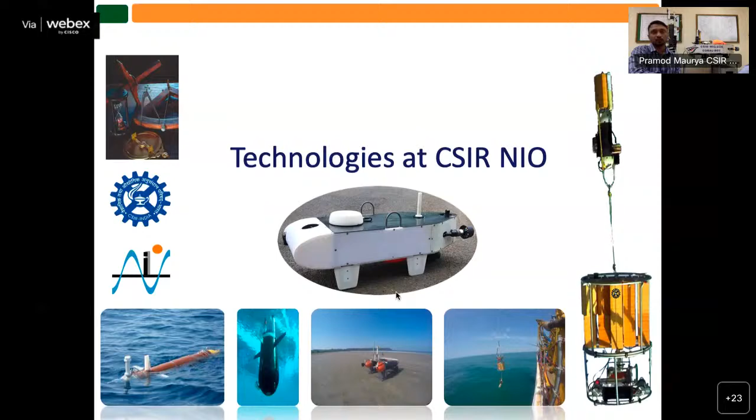We started our work long ago in 2004 by transforming a remotely operable vehicle, which moved on the surface, into a marine robot that would move by itself. That was our first project in marine robotics to develop an autonomous surface craft. We thought it would be an extended arm of a ship, which you could put out, throw in the water, give it a mission, and it would move around while you deploy another one at the next point.

While coming back, one can collect these surface crafts. This was the main idea, and also the starting point from scratch in marine robotics. We had to learn a lot of algorithms on guidance, control, navigation, mechanical sealing, and all that stuff. This vehicle started work in 2004.

We built a small one which could do chlorophyll measurement on the surface, and then finally we built this small one which could do near-coast bathymetry. This covered some of the coast in Goa, including Candolim Beach, where 8-kilometer long transects were done very near the coastline, with depth approximately 2 to 3 meters, almost touching the surf zone.

So this is a challenge: when you have such a vehicle and it goes into the surf zone, how would you still be able to maintain its stability when the waves are pretty high? This work was done recently, and we have been using this vehicle for bathymetric surveys, especially in lakes and very coastal areas.

Your audio, please. Yeah, sorry for this glitch. I hope I'm starting from where I left off.

This was the technology which was awarded in 2010 as an NRDC Innovation Award. There have been many users, and recently two of these units were also sold to BARC for environmental monitoring in water.

Now, the principle of this unit is fairly simple. It remains vertical when thrown into the water because the center of gravity and the center of buoyancy are adjusted in such a way. In the beginning, the buoyancy of the vehicle is more than the weight and the thrust, so the vehicle would just float. As soon as we start the propeller, the thrust force becomes more than the buoyancy, and the vehicle goes down. Then it has an echo sounder to detect the sea bottom.

We can adjust the thruster so that the thrust and buoyancy are equal to each other, and the vehicle hovers at that place, maintaining either a certain distance from the sea bottom or from the sea surface. Then we switch off the propeller, the buoyancy becomes greater, and the vehicle goes back up to the surface, transmitting its data or whatever information we require. So this is how it works.

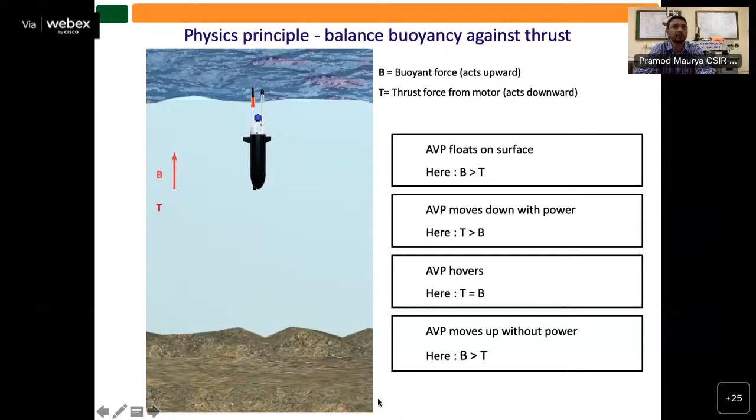This unit is more like a vertical profiler, but it sits at the sea bottom. It has a winch system and communication between two devices: the up unit, which records the profiles, and the down unit, which is responsible for releasing this profiler. We can program it so that at any given time of day, or for any number of profiles per day or per month, it triggers the upper unit to go up based on its buoyancy, with a winch releasing it.

This winch uses a normal tether that does not communicate over the wire, so communication between the two units is done through acoustics. This communication is very important for data redundancy—data is saved in both the down unit and the upper unit, so if the upper unit gets lost, the data is not lost.

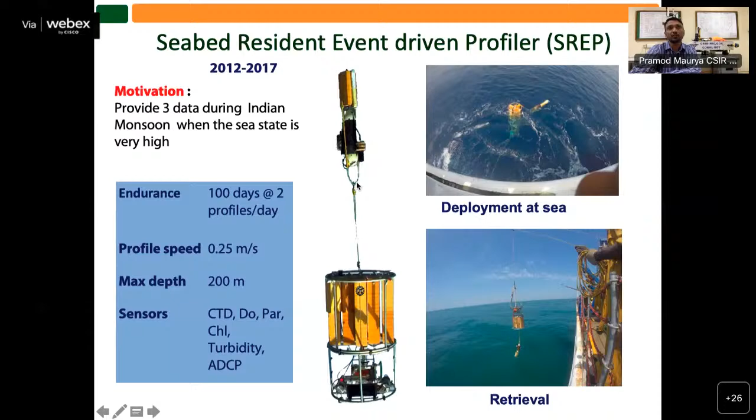Most of the time this unit is sleeping, and when the seabed unit powers on, the profiler unit must also power on at the same time. That is how they perform acoustic communication—they wake up over acoustics, the two devices, and then initiate the profile. This unit has been deployed multiple times over a long period, off Gujarat and off Goa.

Here it was deployed for more than 30 days. It has done 66 profiles, and it shows how the chlorophyll is not really on the surface, which cannot be captured by the satellite, and it shows that at depth you have high chlorophyll. So this kind of data can be very useful for these advisories given by MOES for fisheries.

We also have another technology which we developed, which we call Integrated Coastal Observation Network. So all of these wave rider buoys, sea level gauges, and all our devices are connected through one network, and the data from all of these devices keeps coming to our web server, through which it can be accessed.

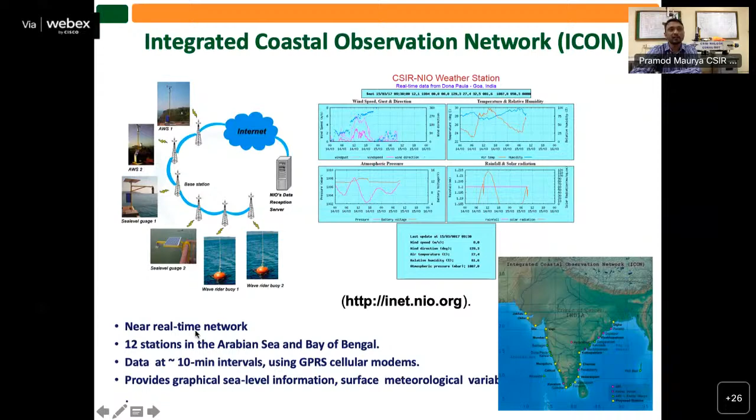Now, there is one example during the Hudhud cyclone time on the East Coast. Many of the units were down, but that is the time when NIO's website got maximum hits because one of these weather stations was still transmitting that data to our server.

So the most recent development which we have done, which I'm going to talk about in a little more detail, is a coral reef and surveillance robot. And this robot we started building in 2018.

And now it has reached TRL level 8, where we have demonstrated it in the real environment. With little more work, it can actually be seen as a professional device which can be used by the industry.

So the main applications we thought of are seabed monitoring, which includes all kinds of industrial applications like pipeline inspection and search and rescue, and, importantly from the environmental point of view, it can be used for coral reef monitoring.

So we worked on mechanical, hydrodynamics, communication system, all that which is required for an underwater vehicle, electronic hardware, software, navigation, guidance and control, which we have learned over all these vehicles, and we have become one of the experts in this for underwater vehicles, electrical systems, and of course safety of the vehicle itself.

This vehicle is designed in such a way that it can transform into a long-term device where it can dock into a docking station, maintain itself, and do surveys at given times, and it will also have its own charging capabilities.

So that's a future thing, but right now the vehicle is able to be used as an autonomous underwater vehicle, which can do image and other scientific data collection for any given survey.

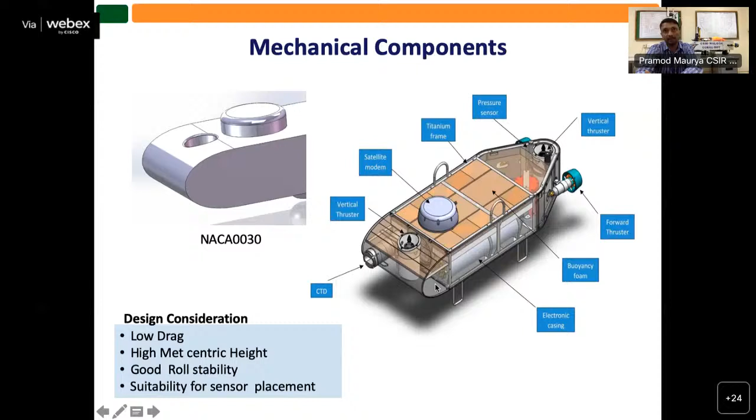and when it cannot be connected to the radio frequency modems. So this has all the vehicle payloads which are required. Apart from that, it has the capability of carrying side scan sonar, cameras, and imaging sonars as well.

So we normally follow a method whenever we have an idea to design, whenever we have a requirement from the industry or from researchers: we start a project, and in the middle or beginning of the project itself, we try to invite industries to see how useful it will be for them. One of these inventor-user industry workshops was conducted for this device, wherein we had invited people from different sectors of industry, and many of them are already here in this meeting as well.

And we gave a preliminary demonstration of the vehicle at that time on the surface. We discussed what it will be able to do, and we had industry involved right from the beginning on this.

And then we moved it—that was a confined water test—and then we took it to the beach here. This is our Bambolim beach here in Goa. And you see how two people can actually take it and put it on the coast.

And the water here is very turbid, so we cannot show you underwater images, but at least we can show you in the video how the vehicle is moving on the surface. It was carrying two buoys on the back as marker buoys, so that we can see from afar where the device is.

Getting it to the main work of coral reef monitoring and into the real environment, the vehicle should be able to take images and videos of the seabed. This vehicle was operated here in Grande Island, where it acquired coral reef images underwater. We did several missions there, lawn mowers, straight lines, and many other planned missions. This is one of the videos showing the vehicle moving.

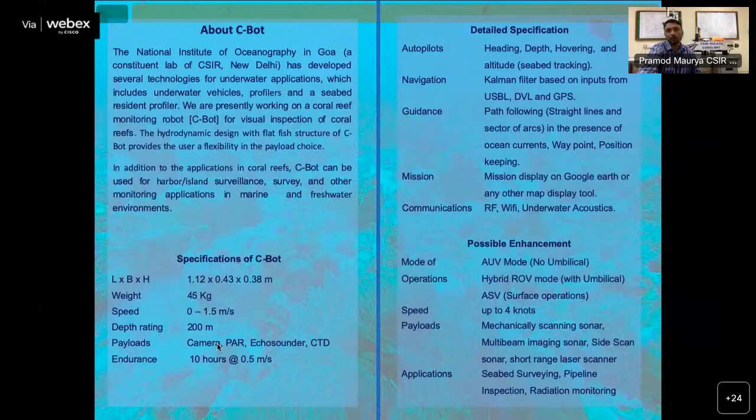Now I would give a little glimpse about future technologies we are going to work on. We call it hybrid AUVs, because autonomous underwater vehicles cannot send a live feed from the bottom due to the bottleneck of acoustic communication, whereas remotely operated vehicles are connected through a tether and operated manually by an operator on top. What we wanted to do is make an autonomous vehicle which is also connected through an umbilical, from where real-time transmission of images happens, but there is no human operator on top. It is self-driven, and if the umbilical gets cut, the vehicle knows where to go, completes the mission, and comes back to the surface.

So what we did is take some recent existing hardware and transform the software completely so this whole vehicle can become an autonomous underwater vehicle, where we only give the mission survey from the top and just watch. Not only that, we are planning that whenever the vehicle sees something interesting based on artificial intelligence, it would trigger the user on top, who can take command and say, give me a high resolution scan of that particular area. This kind of mission will be very near-future technology, which we call hybrid AUVs.

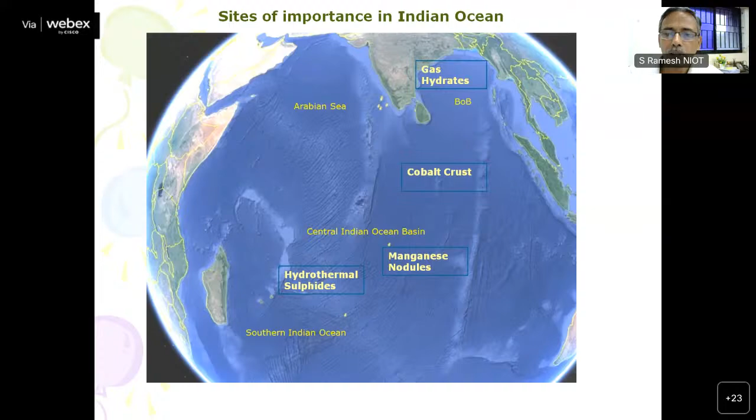Basically this tells us what to look for in the deep sea, and there are many challenges in the deep ocean, which all of us are aware of. One is the pressure, another is the temperature, and acoustic is the only medium of communication. It's highly corrosive in seawater, and a very dynamic medium, because those who have sailed in the ocean know how difficult it is to put a vehicle there.

Heavy vehicles need big launching and recovery systems, which is a big challenge, and we have a very small seasonal time window available to deploy and retrieve them. We need suitable materials and hydraulics connected to a stable platform with DP. So many environment-related technical challenges are there, and over time, we are overcoming them one by one from a design perspective.

We are now mature enough to take forward these technologies, but we need industries to come along with us, because most of the components we are looking for right now for deeper water applications are being imported from abroad. So these discussions will take forward how much indigenization is possible in the coming years in this underwater technology.

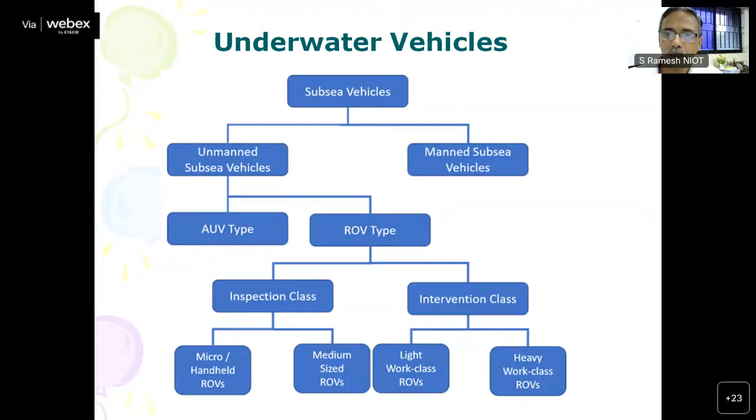So all of us know about the underwater vehicle. One is the unmanned vehicle family, another is the manned vehicle family. AUV has already been talked about by Maurya, and subsequently Dr. Nandi will also be talking about the AUV. So I'll mostly be covering the seafloor based vehicles and the remote vehicles. The manned vehicle will be talked about by our friend Dr. Vedachalam after me. So basically, this is a remotely operable submersible which is developed by NIOT.

It is a 6,000 meter depth rated vehicle. It is a heavy work class ROV, which needs a lot of subsystems. It was an initial design where we collaborated with Russia. Then from that design, we took it forward, imported all the components, and integrated them. Then the testing and qualifications were done by us, component wise.

So it has an ROV which can go up to 6,000 meters at the bottom. It will be connected by a tether of 400 meter cable with the tether management system. These two will be together, and it will be linked by a 7,000 meter umbilical cable on top as a storage winch. And this is our ship, Sagar Nidhi.

So we can see the size of the components which we are handling. We need a big ship plus a platform. We have a heavy launching and recovery system to handle almost 8 tons of weight, which is 3.7 tons of the ROV, and another 3 tons of the tether management system together. It needs a heavy crane, and the cable has to be handled with the traction winch, to take the load of the cable once it is released into the water. Then we have a storage winch of 7,000 meter cable.

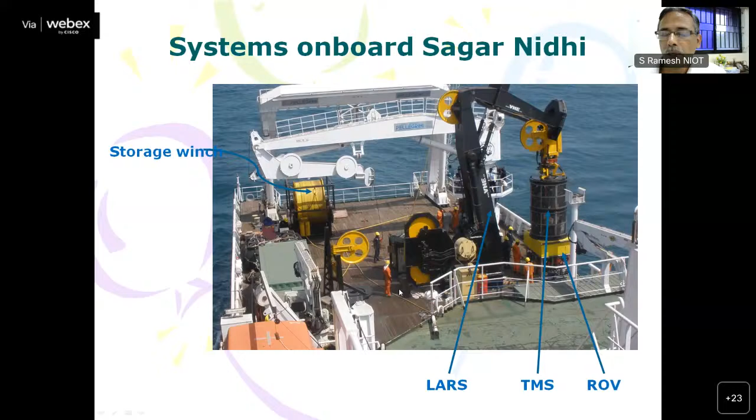So this cable is again imported, from Nexans. We had connected this entire vehicle. We have 2 containers - we used to take containers, consoles, and the power systems in our own ship, Sagar Nidhi. This is the vehicle which has been developed and demonstrated its capability up to 5,000 meter depth. This is the specification of the vehicle.

As our director said, it has gone into different types of seafloor mineral explorations. Basically, it is of 3.7 tons. It's a heavy work class vehicle - only 4 or 5 vehicles are available in the world of this class. It has a manipulator arm, 2 robotic arms which are hydraulically connected, and it has scientific payloads also - temperature, oxygen, conductivity - and we can add any other payloads.

And mainly it is driven by BLDC thrusters. So there are 2 thrusters for the forward motion and 3 for going down, because it's a buoyant vehicle. Along with the TMS, it will be taken to 6,000 meters. Then it will be disengaged from the tether, and then we will operate the thrusters, with 2 for the lateral motion. So there are 7 thrusters in this vehicle.

We are looking forward to the development of indigenization of these thrusters also. This is how the power systems are driven from the ship-based power, going through the 7,000 meter umbilical cable. There is a variable frequency drive, so we are increasing the normal voltage of 400 volts into 6,000 volts, and the frequency also from 50 hertz going to 460 hertz. With that high frequency and high voltage, through the umbilical cable, we drive the tether management system, and then it goes into the ROV. There are subsea converters which give direct DC voltage of 300 volts and 24 volts for the thrusters, as well as for the lights, power, and other sensors.

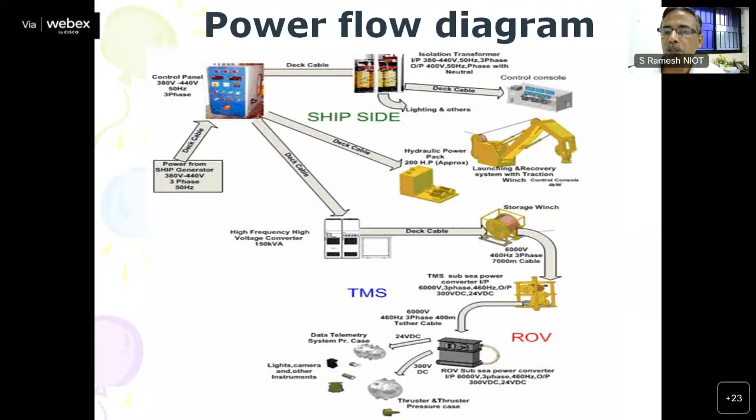So we are looking for industrial partners for any of these components that can be chosen and indigenized. It is possible, and you can visit our institute anytime to see the components interfaced in these systems. This control system architecture houses 3 PCs where we have a pilot and co-pilot screen, and a display for the engineering screen. It has been communicated with the PXI system, through which we have the TMS and ROV. We are using LabVIEW based National Instrument hardware and software for the controls and operation purposes, which will be connected through the cameras, lights, and sensors.

Since it's a long cable of 7,000 meters, we need optical communication to transmit the controls, so we have 2 slip rings coming into picture. Slip rings are rotary joints connected to the 7,000 meter deck storage winch, and in the underwater tether management system we have an underwater slip ring. Globally, there's maybe only 1 firm, or 1 more, available with proven technology for this type of rotary joint that gives communication to the subsea level to transmit all the data sets.

So we have slip rings connected through fibers. We now have the expertise developed for this concept of how the slip rings can be designed and developed, as well as the termination assembly for the interface of splicing for underwater purposes with the fiber optics. And there will be a control console.

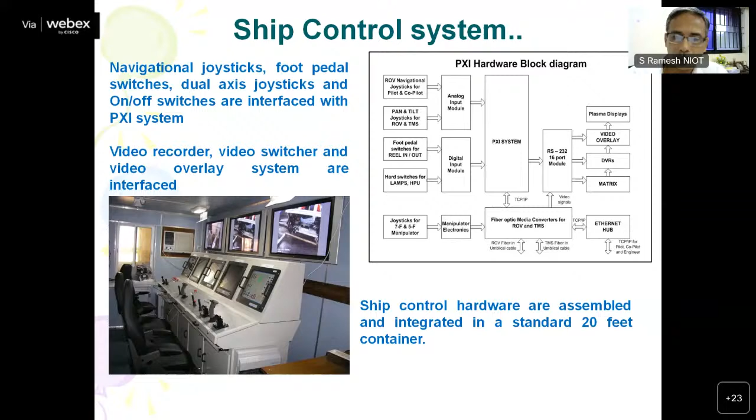This console also has been done in an indigenized way, but components are again getting imported for the interfaces. We have a control console where we will be sitting and operating the vehicle in a 20 feet container, which will have the manipulator control separately. The manipulator is imported from the International Submarine Engineering agency in Canada. This is how the ROV control systems look - I've put one small picture here.

We have to have the wirings and interconnections of all the components in a small pressure case. We have 2 types of underwater components: one is pressure case driven, where components can be kept at 1 atmospheric pressure, and another is pressure compensated devices, which we use for the power systems and similar.

These components will be used with the inertial navigation system, interfaced with the PXI. Then the command will go to the cameras and other control systems. So we need partners who can also assemble this, with that expertise available - it will also be useful for our type of purposes.

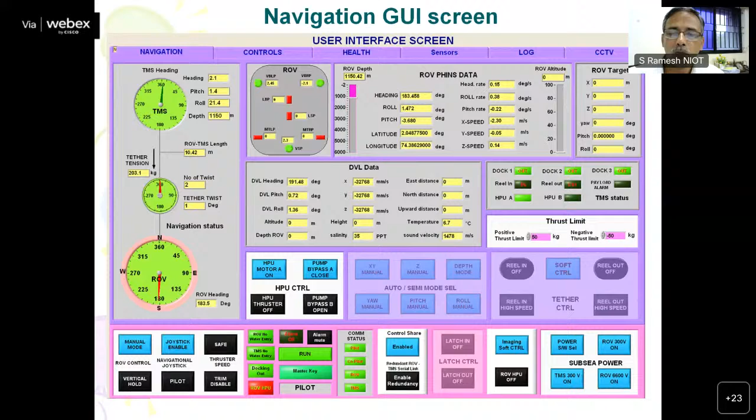As I said, LabVIEW is our own software which we control through NI, and we have different screens which have been augmented over the period of our experience - how to display all the components during our operations, and in case of any emergency, alarms and so on.

We had deployed this vehicle up to 5,289 meters water depth in the Central Indian Ocean basin, where we collected nodules using a push corer and robotic arms with manipulators, which proves the vehicle's capability. We undocked the vehicle and were able to go to the sea floor and get mapping, along with outputs for scientific needs.

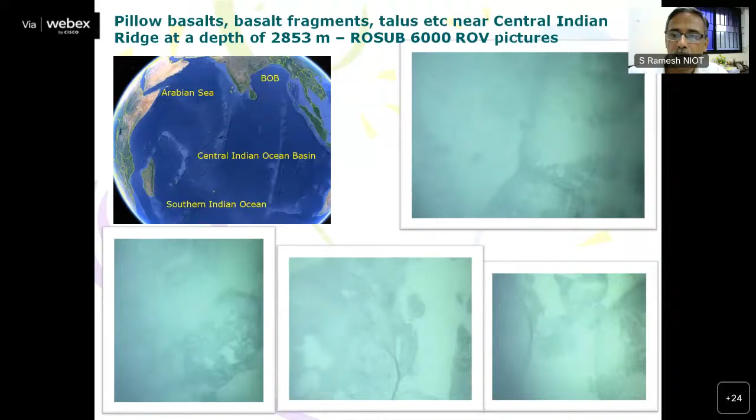This vehicle was also used in the AN-32 aircraft search operation at 3,400 meter depth, but unfortunately we were not able to locate that object, because of its dimensions and since it's a torch-like vehicle, we had to go near it. We only saw the soft seafloor with organisms, and were not able to detect the target.

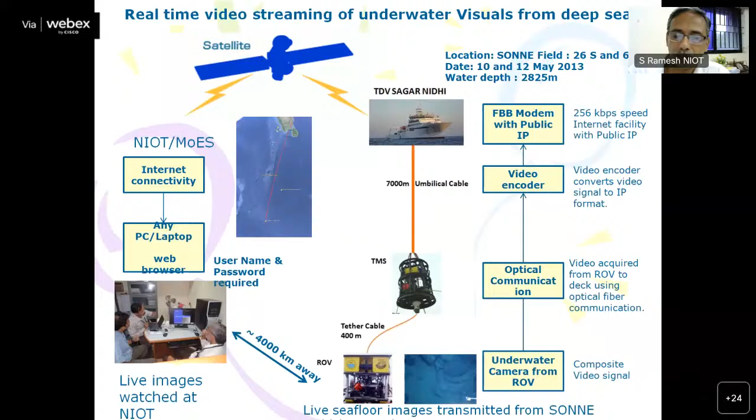But this vehicle has had multiple uses for different purposes. Basically, this technology is proved and is available with us. We are also transmitting the knowledge - when we do the operations, it gets transmitted to our main base stations by online video streaming, connected through the optical modem to the base station, so people from NIOT can watch what is happening at the deep sea.

Another vehicle we subsequently developed because of market necessity. 6,000 meter vehicles are very cumbersome - they are big vehicles, and only a few are available in the world. But when we go for a shallow water vehicle, it will be good.

That was the thought process. So we had developed another shallow water ROV vehicle, which is a 500 meter depth rated one, made of polypropylene with syntactic foams. It is again 300 volt DC with 5 kilowatt hour power, and has BLDC thrusters. There are 4 thrusters: 2 for forward, 1 for lateral, and 1 for vertical motions. This is how this vehicle is developed.

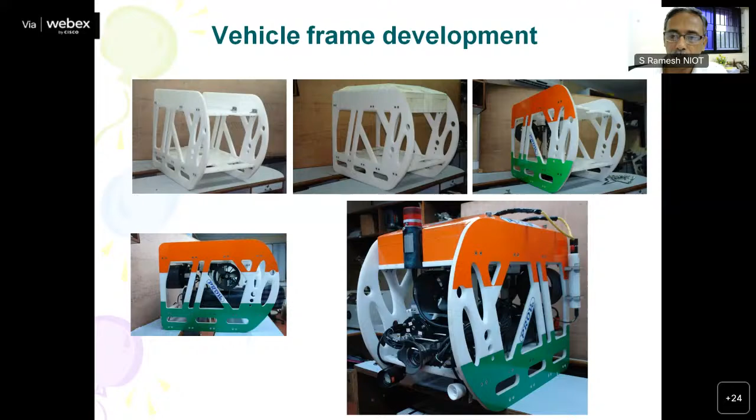There is a frame with polypropylene sheets, and we assembled all the components on this vehicle. Again, it is 300 volt DC converted from the ship systems, and many of the components are indigenous, with our own design and our own termination assemblies. Only the underwater components like thrusters, cables, lights, and cameras have to be imported.

One good thing that happened on this program is we could discuss with the cable industry, who are also participating in today's discussion, and we could make the earlier imported components from Nexans for the deep water cables indigenous. We now have 2 cables procured from APAR. They have developed the capability of electro-optic umbilical cable development for shorter distances.

So that is one good outcome of this shallow water ROV development, and we are actually using those cables now. There will also be a small console, so it can be used on any fishing trawler type small boat, and we can put together all the vehicles and go for operations.

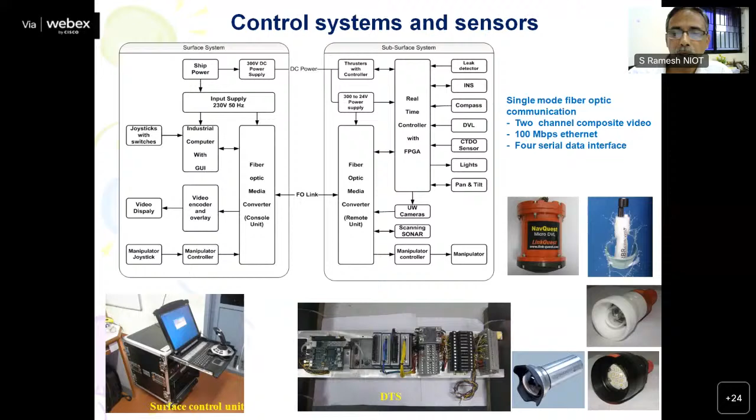This vehicle has been used at the Antarctic station for ice shelf mapping as well as near-lake studies, and it has been used for seaweed mapping at 40 meter water depth off Mangalore. We could see the seaweed distribution there. And for coral reefs also in Andaman, around 5 islands, we could monitor very quickly within 4 or 5 days.

It's a very stable vehicle which has proved its capability for operation up to 500 meter depth, and it has been used extensively for some classified object identification at around 70 to 80 meter water depth in the Bay of Bengal.

Another system we are developing is the integrated mining system, rated for 6,000 meter depth. It has a lot of subsystems and components. This system is handled by Commander Gop Kumar, and it has a deep sea crawler, which is a track belt based vehicle.

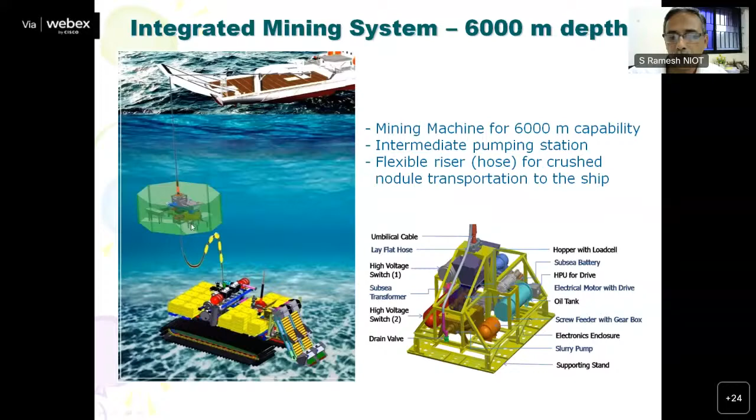In front, we have collector devices, and the nodules available at 6,000 meters will be collected, crushed, and pumped to the middle station, and then there will be a flexible riser to go to the top. We had demonstrated the capability of this vehicle for locomotion at 6,000 meter water depth at the Central Indian Ocean Basin. In the coming years, the collectors will be performed, then the riser has to be done.

It has a lot of complex technology. Nowhere in the world has this technology been proved, and India is also one of the forerunners in proving this capability for nodule mining systems.

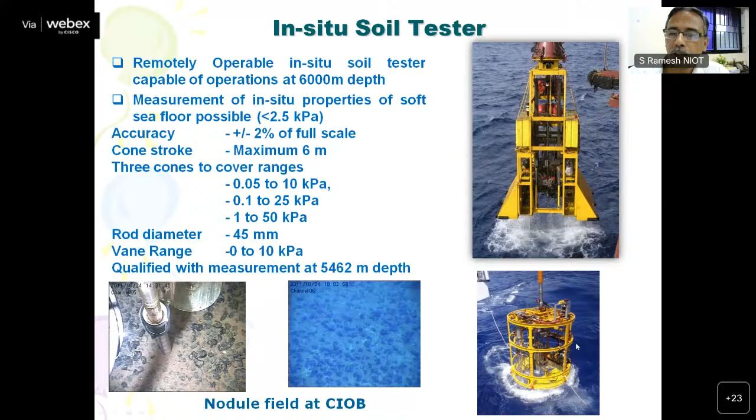We have also developed the soil tester, rated for 6,000 meters, to be used before putting the crawler into the deep sea floor. This is the nodule field at 6,000 meters. It has been proved at 5,462 meter water depth. This is the in-situ soil tester, which can be used for seafloor strength and shear strength measurements.

We have also developed a deep sea autonomous coring system with an industrial partner from the US. Only 3 such systems are available in the world. It's a deep sea subsea drill that can go up to 3,000 meter water depth and collect 100 meters of subsea core in 3 meter sections in a robotic way.

It has large feet on the bottom, which can be opened up with hydraulic systems, then sit on the seafloor and drill further as required for coring. These are all the different subsea systems. It's like a ship-based drilling unit put into underwater use, with only the umbilical connected on top.

It will be similar to the control systems and power systems discussed for the ROSUB 6000 and the crawler-based machines. So we will be operating from the top using camera devices, operating the drill machines and drilling units. It has a big frame, with all the power bottles kept on one side and the drill heads on the other side.

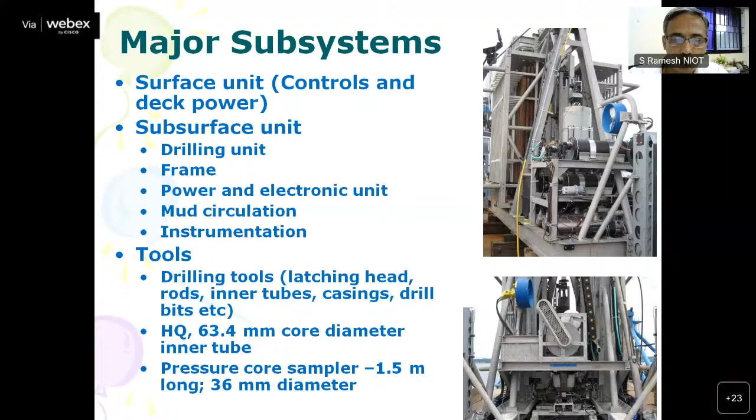We will be connecting 3 meter sections to go for the 100 meter coring. These are all some of the underwater pictures which were done at 1070 meter water depth and 2000 meter water depth. So these are all the pipes which are connected.

There will be a rotary mechanism from the top of the drill. We can disconnect 3 meter sections, then take them back into the magazines. Then we can connect another tube and drill another section of 3 meters. We can use a wireline tool to pick up the sample alone, and again put it back.

So all the operations are of a depth rating of 3000 meters. We had qualified up to 2920 meters, and then we could collect 60 meters of the subsea floor from the Krishna Godavari basin. So these are all some of the samples collected from the core, which are of scientific interest and can be used for geotechnical purposes.

And recently we had augmented ourselves with the autonomous underwater vehicle, a 6000 meter underwater vehicle, procured directly from Kongsberg Maritime from Norway. This vehicle is a 6000 meter vehicle for the exploration of deep sea minerals, which has a lot of scientific payloads like multi-beam sonar, synthetic aperture sonar, sub-bottom profiler, ADCP, and all that we are looking for.

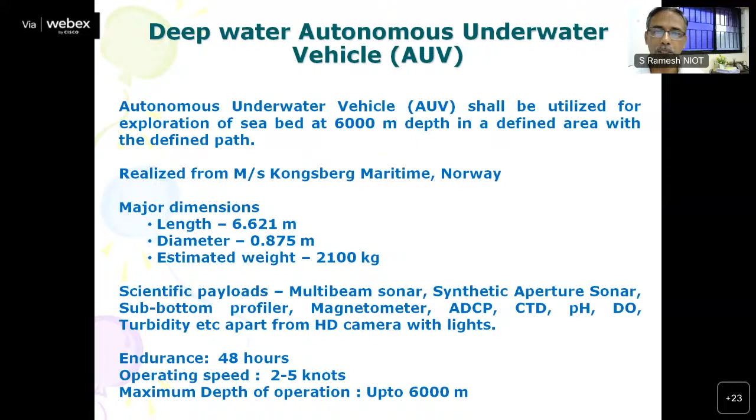It has 48 hours of long endurance. So once you program it and put it into the water, we can wait while it covers the lines. When we pick it back, we will download all the data sets. It can go up to 2 to 5 knot speed. If we are going only with the multi-beam data sets, we can even go for 72 hours of endurance. So based on our own program, we can intervene with these systems.

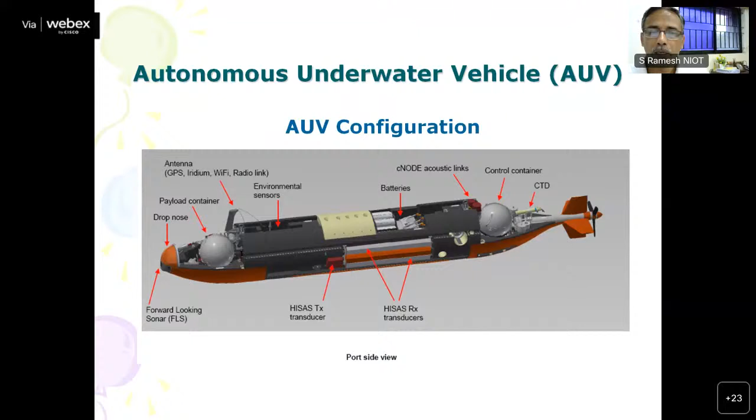This is the vehicle which has different types of sensors and payloads. It is from the Hugin family of Kongsberg, and it has already proved its capability for 6000 meters in different places. Now we procured one system from Hugin, called the Ocean Mineral Explorer. We are calling it OME 6000.

It has a velocity log and it has a containerized launch system. So we have to carry a 30-foot container and put it on the aft of the ship, and it is of 2-ton weight. It has its own hangar with a launching platform, and it will be tilted 45 degrees and slid into the water autonomously.

It will go into the water, then on a pre-programmed way it will do the job. It will surface back, then there are mechanisms to pick back the vehicle onto the top. Again, we will pull back the vehicle on top. This has performed at Norway, almost 1270 meters water depth, and it has performed its operation successfully.

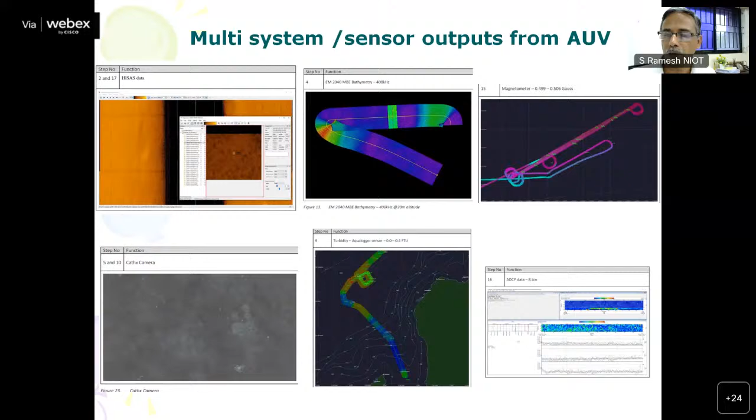Now this vehicle is at NIOT. We are going for exploration this September and November for the 5000 meter water depth for deep sea exploration. And based on our experience with the ROV technology, we had transferred this technology to L&T Defense and Bharat Electronics with the know-how available. We are closely hand-holding them for any requirements if users are coming, and it can be a first prototype ROV which can be transferred.

We had also indigenized the shallow water winch for the 600 meter cable and the terminations, which we mastered for the 6000 meter. Apar Industries gave us the cable, and Ruby International Ghaziabad gave us the winch. We gave them the design, and they were able to fabricate it with even the connection for the rotary joint for the slip rings.

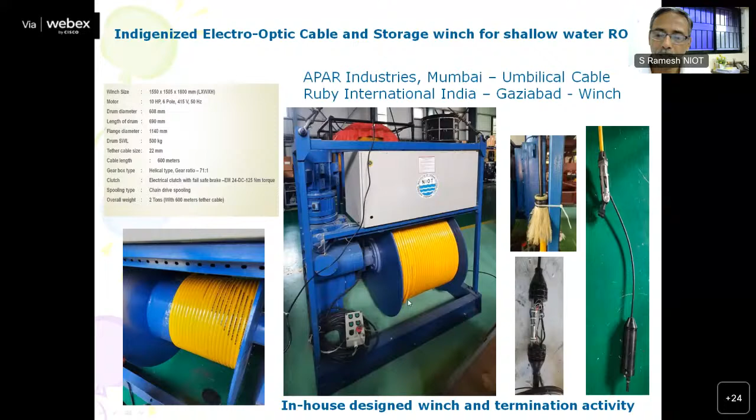So one more expertise developed is for deep water, where termination assemblies are very critical. NIOT has this capability in the country to do mechanical termination, electrical termination, as well as fiber optic termination put together in one cable, for operation up to deep water of 6000 meters. Earlier we were paying almost 50-60 lakhs for one termination to foreign agencies. Now we have this capability, and we could do it the indigenized way with our own people in the institute.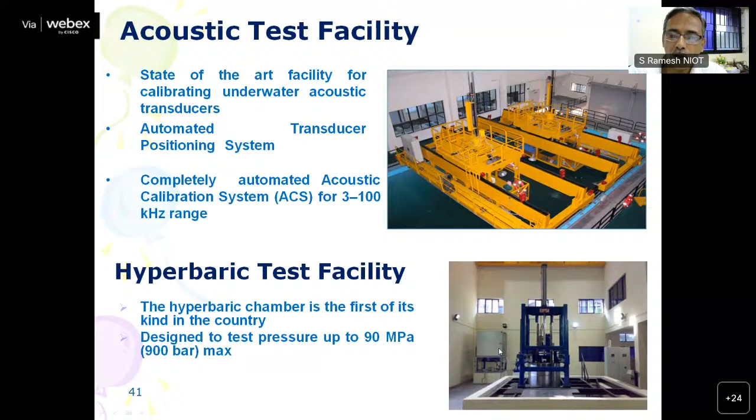This technology also we are willing to transfer to whomever we are looking for. We have two facilities for underwater testing that we wanted to convey. One is the acoustic test facility tank, where we can put any components for testing. And we have a hyperbaric test facility for 900 bar pressure, 90 megapascals, where we can put all components and test them live to monitor when they fail and when they succeed. These facilities are also available to industry to qualify any components if they are investing, and then take it forward with our own vehicles.

These are the few things which I want to put forth to the industrial partners: we are desperately in need of BLDC motor-driven thrusters. For all of us, whether it is for NIO or for defense purposes, defense labs and NIOT, BLDC motors and the deep sea winches of larger size, and underwater cables and connectors, we are paying heavily to the industry and international partners.

If any industry comes forward, we can facilitate testing for rotary joints, pressure compensators, underwater cameras and lights, manipulators, low density buoyancy modules for flotation of vehicles, termination assemblies, hydraulic cylinders and manifolds, and latching mechanisms. These are a few things I thought to put forth into the industry's mindset.

So at the end, I would like to say that the middle part of the 4 vehicles, we have already developed. Then the autonomous underwater vehicle we procured from Kongsberg, 6,000 meter one. Right now we are working on both ends: the integrated underwater mining system for deep water, which will mine and pump the nodules to the surface, and the manned submersible Matsya 6000. These two are the deep ocean mission critical programs we are handling right now. The manned submersible talk will be delivered after me, by Dr. Vedachalam in detail.

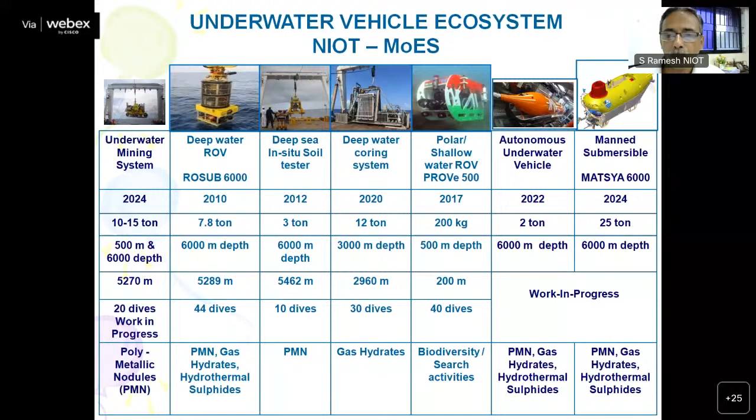Finally, to sum up the discussions from the strategic perspective, different organizations can form alliances, form partnerships to jointly invest in emerging industries to overcome local market restrictions, diversify our risks, and gain mutual benefits. So how we can work it out, we can think of all these things.

There are a plethora of design and development opportunities available to the private sector in manufacturing for underwater systems. You might have seen the NIO presentation by Maurya, and now this presentation, followed by two more presentations by our colleagues. This will show that different technology and knowledge is available with scientists and technology organizations. How to translate it into industry, we can work out.

So it will give us self-reliance in design and construction with indigenous components. The aim of this meet is to have the capability available within India for product realization. In order to fulfill these aspirations as a strong industrial base in ocean technology, now the time has come for us to come together and strengthen ourselves by filling the gaps in our weaknesses.

Earlier we were all in silos; now we can put it together and come out with a concrete plan to utilize the infrastructure, manufacturing capability, and test facilities available within ourselves. The government is encouraging such type of partnerships, so we are ready to support it.

Industry and academia in a collaborative roundtable provides opportunity and roles for each of us instead of overlapping each other. It can be done with concrete measures, with a societal centric approach and strategic need and commercial interest. With this, I would like to close my presentation. Thank you.

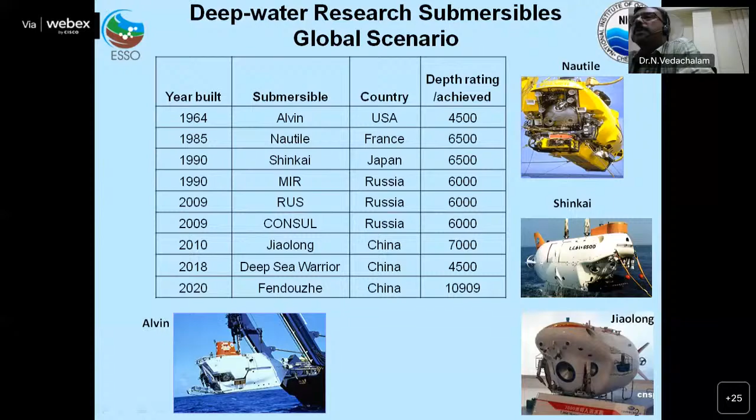So India has also now joined the race to the sea bottom using this manned submersible Matsya 6000. As we all know, this is a mini submarine which can carry 3 people down to 6,000 meter water depth.

It is an untethered vehicle which will be launched from the ship. So you can see the submersible being launched from the mothership using the A-frame.

The system comprises 2 parts: the ship system, which comprises of A-frame and launching systems and other respective controls, and other communication devices such as underwater telephone, positioning devices, surface finders, etc. on the ship deck.

The submersible comprises multiple subsystems, including the personnel sphere for human occupancy, human safety and support systems, frame, ballast and trim systems, buoyancy packages, battery power for maneuvering and propulsion, control hardware, communication and navigation devices, imaging system, etc.

So initially the work on this manned submersible started some 8 years back by NIOT. Initially the plan for the ministry was to procure a manned submersible with technology transfer from outside.

Later there were multiple challenges, and before 3 years, the government decided that under the Make in India concept, we can develop our own indigenous submersible. The expertise was pooled and the work was started. So this is the history behind this development.

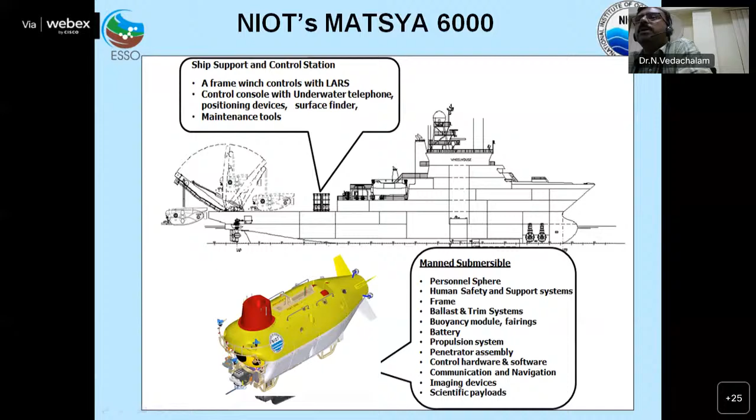This project is being monitored and guided by various experts in addition to the in-house team. Based on this, the specifications of the manned submersible are something like 6,000 meters water depth, and the human cabin, which we call the personnel sphere, will be made out of titanium alloy grade 23.

It will be of 2.1 meter diameter. The main challenge is making the spherical sphere out of titanium alloy. The accommodation will be for 1 pilot and 2 crew. The number of viewports will be 3: 1 primary and 2 secondary.

The vehicle speed will be 3 knots forward, lateral 1 knot, and vertical also 1 knot, which will be enabled by 6 kilowatt thrusters. Endurance will be for 12 hours and the emergency period will be for 96 hours.

The life support system inside the human cabin will comprise an oxygen supply system and CO2 scrubber system, and that will be designed for catering 12 hours of operation and 96 hours of stay during emergency.

The overall weight is being targeted for 25 tons. The dimensions: it's 9 meters long, 4 meters breadth and 4.5 meters high. The payload which is designed, which the submersible can take, is around 200 kg, enabled by manipulators.

It can take these payloads in pieces, and it can put it in the science basket and bring it to the top.

The propulsion is powered by battery power source, mainly lithium polymer batteries. These are special compensated batteries. For propulsion it is 100 kilowatt hour, auxiliary is 20 kilowatt hour, and emergency is 5 kilowatt hour. Total put together, the energy sources on board will be 125 kilowatt hour.

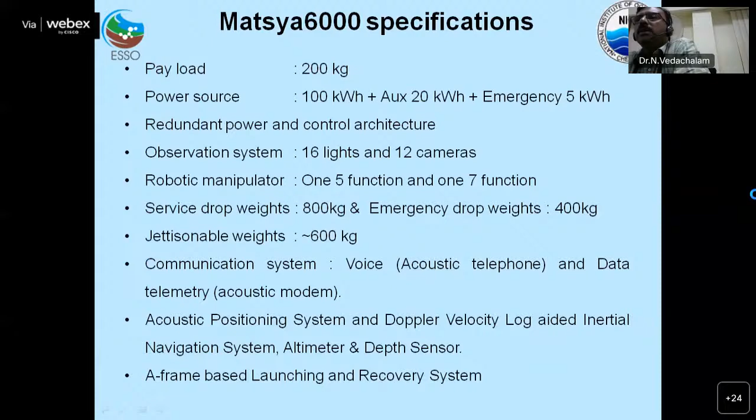So the design team has done a lot of basic design, and it has been reviewed by multiple experts, and we have the Norwegian global certification agency called DNV in place, who will validate the design, oversee the design, and give clearance for man-ratedness.

Based on this, various subsystems have been identified, and the general arrangement is being made. The hydrostatic stability is being confirmed for stability and freeboard, and the hydrodynamic analysis is also done, so that the mission period is met with the available energy capacity, etc.

So you can see this. This is a human cabin where 3 people will be sitting inside, and there will be a hatch at the top for people to enter. There will be 3 viewports, primary viewport and secondary viewport.

For catering the life support for the people, there will be sensors inside, and there will be oxygen supply and scrubbing inside. In front, there will be a manipulator to take in the payloads and keep it in the science basket.

There will be communication systems mounted on the top to communicate with the ship, and there will be guidance antennas for guidance and navigation system mounted on top, preventing any shadow zones. This is called the sail, which will be put on top of this one.

By this, we have something called a ballast management system, called main ballast system, which can take in water of around 3 tons, and make it negatively buoyant and go down.

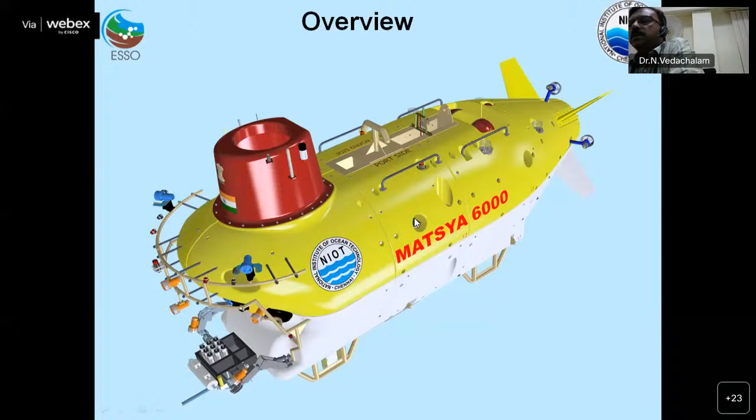So the concept of operation, I will give a little glance of this one. As I told you, the launching of the submersible takes almost 3 to 4 hours to go down to 5,500 meters water depth, which is the deepest part in the Indian Ocean. As explained by Dr. Ramesh, we have various resources, hydrocarbon as well as mineral resources, spread over the Indian waters, the Indian Ocean, Bay of Bengal, Arabian Sea, etc. And the maximum water depth is 5,500 meters, and therefore we have designed the submersible to go up to 6,000 meters water depth, and accordingly the systems are designed.

So now, as I indicated, this is called the main ballast system, and this is called the variable ballast system, and there will be some drop weights which will be fitted on board the vehicle. So this will be launched from the ship, and at that time this main ballast will be empty, and when it is floating, it will give a freeboard of some 1 meter, as per the statutory requirements and safety.

And then when it is ready for the deployment, or when it is ready to dive, the main ballast tanks will be filled, and it will attain a negative buoyancy of 300 kg, and it will have a terminal velocity of 30 meters per minute, and it descends down at the required rate of 30 meters per minute.

And the important thing is that before going, and in between, what happens is that because of the salinity of the water and the compressibility nature of the water, the different parts of the submersible will be subject to different types of compression, and therefore there will be a change in the buoyancy.

So as I told you, the instrumentation and control architecture, if you can see, this is the human cabin. All control systems are located inside. We have a data acquisition system, a pilot PC, co-pilot PC, navigation PC, everything. As you can see, it is axisymmetric, a mirror image, so that failure possibilities can be reduced and availability can be increased.

All these systems are connected to the exostructure through high integrity penetrators, which are advanced versions of seals. Connections to the exostructure systems, including the data acquisition enclosure and batteries, are all located in the exostructure. Everything is done using a special arrangement called pressure compensated junction boxes, which helps reduce failures. There will be two main batteries on the port and starboard side, interfaced directly to the junction box and in turn to the personnel sphere and the power distribution enclosure.

Two enclosures will house power conversion systems enabling variable speed operation of the propellers. We have the data acquisition and imaging enclosure, also axisymmetric in architecture, connected to this one. We also have service drop weights and emergency drop weights, symmetrically placed. Under any circumstances, we comply with SIL 3 level of architecture, and the moment the safety reliability integrity level falls below SIL, a decision will be taken by the pilot to surface back without compromising human safety.

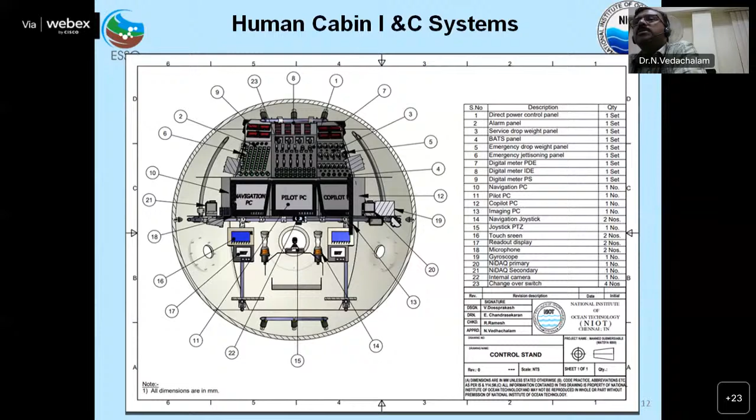First is the comfort level for the three human beings, since they are important for the mission - it's a manned mission - so all three people have to be comfortable during normal operation as well as emergency periods. They occupy 30% of the space, instrumentation occupies another 30%, and the remaining space is occupied by the life support system, comprising oxygen cylinders, nitrogen, etc. This view shows the complexities of how a human cabin should be engineered and populated so as to have the best possible ergonomics as well as ease of operation and comfort.

So in that way, we are planning to make the thing for Matsya 6000, taking into aspect reachability and easy readability. Mainly, these three people will be here during 96 hours of emergency. You can understand how the psychology of the people will be, what the energy level will be. So the switches will be placed in such a way that it will be easy to operate. So you can see this is one hemisphere of the personnel cabin.

Then you can see fire extinguishers, emergency breathing apparatus, etc. These life support systems are made to support 12 hours plus 96 hours of emergency, totally 108 hours. There will be a carbon dioxide scrubber. When the carbon dioxide exceeds the predetermined limit, this will start operation, and they are based upon soda lime chemical.

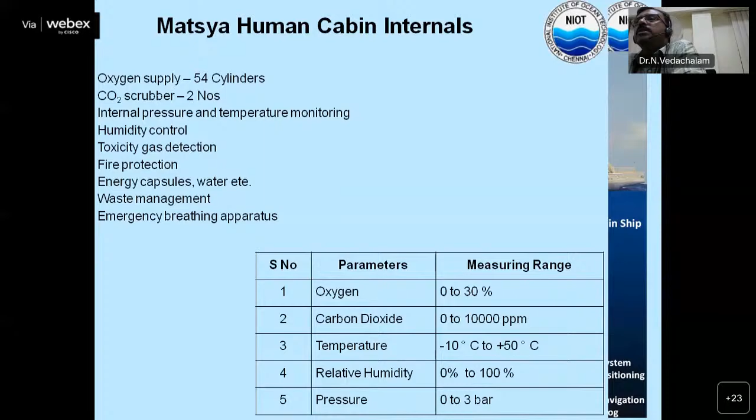With respect to navigation and positioning systems, this is Matsya 6000 underwater. It will have a Subsea GPS which works on the surface and supports dead reckoning navigation. There will be a depth sensor to see the depth for safe maneuvering. Using the INS DVL, it will determine the position and help vehicle navigation.

There will be two acoustic positioning systems. One system will work with reference to the ship, and another system will work with reference to the submersible. Both will, through acoustic communication, exchange data, and this will help us achieve the highest level of reliability for positioning. There will be a mission control system at the top which will help connect these devices and track the submersible. So this is how the integrated navigation system will look.

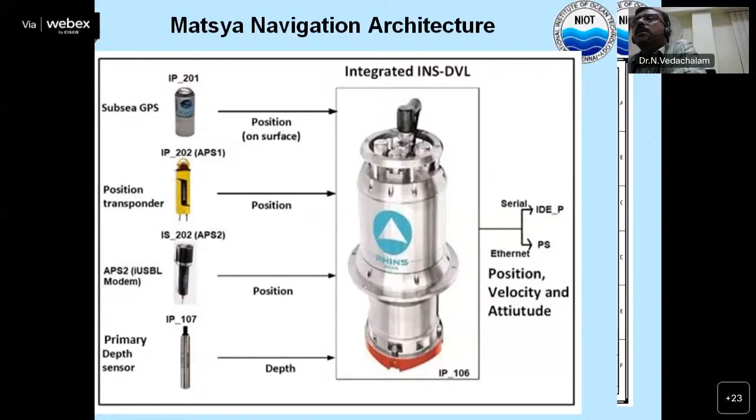It will have inputs from Subsea GPS and two position transponders and the depth, and it will operate the Kalman filter algorithm, finally giving the position which will aid the navigation personnel or the crew. So this is how the navigation system will be connected.

The navigation system will be spread across the personnel sphere, junction boxes, and external enclosures, connected through pressure rated cables, etc. As you can imagine, these pressure rated cables are very critical, and they have to be tested to the highest level based on international norms, tested at double the pressure to confirm the integrity over time.

Another important thing is underwater communication, done using acoustic telephones. This acoustic telephone we are procuring from abroad, and it is a very niche technology able to work up to a depth of 6,000 meters. The statutory requirement is that it needs to operate up to 12 kilometers slant range. So it is quite challenging, and only one or two companies in the world supply this, and they too are covered under export regulations, and therefore anyone procuring this does so through diplomatic channels.

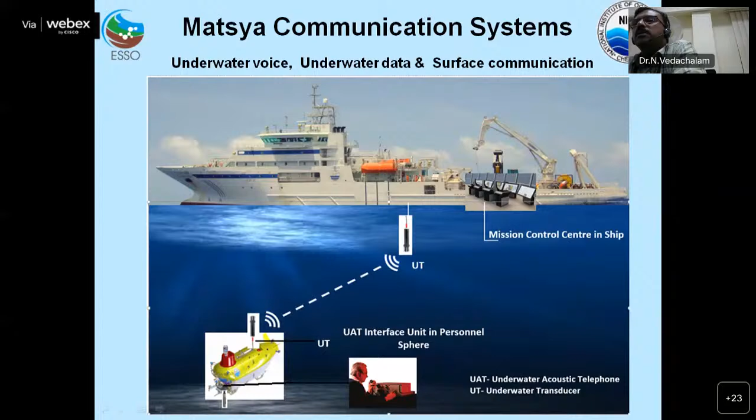As you know, the submersible will have lights and cameras all around, because the ultimate aim of the mission is to collect high resolution data on biology, geology, etc. So it will be placed at strategic locations so that everything will be covered around the submersible at a reasonable field of view. This is how it is interfaced, as I told you for the navigation systems.

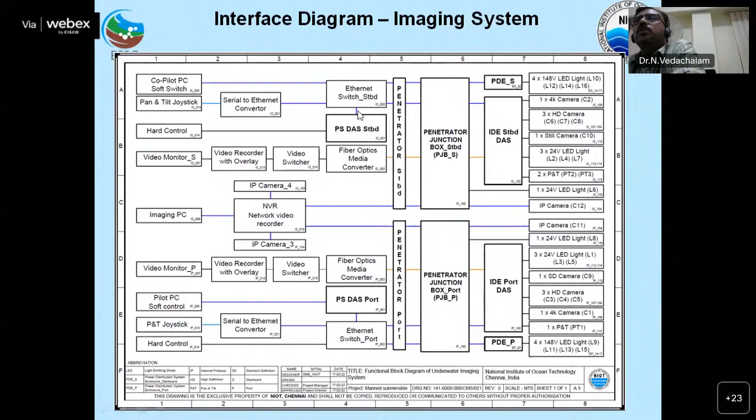These lights and cameras are integrated through different pressure rated enclosures and brought inside the human cabin, and the recording will be done inside the human cabin. So by and large, you can see the instrumentation and control systems of the manned submersible located in different locations.

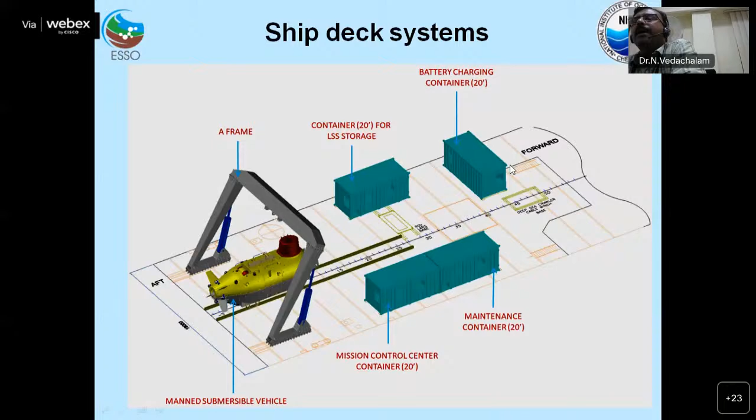As I told you, all these systems will be mounted on the ship. This is the submersible A-frame. This mission control system will be kept on board the ship, and there will be a container for life support systems, battery charging, etc. This will be launched as well. This is a layout which is being planned for launching on board Sagar Nidhi.

As I was telling, the mission control system will be there. There is a guideline called IMCA, International Marine Contractors Association, based on which this mission control system is being designed. More importantly, during an emergency, if the submersible is stranded on the seafloor because of some problems...

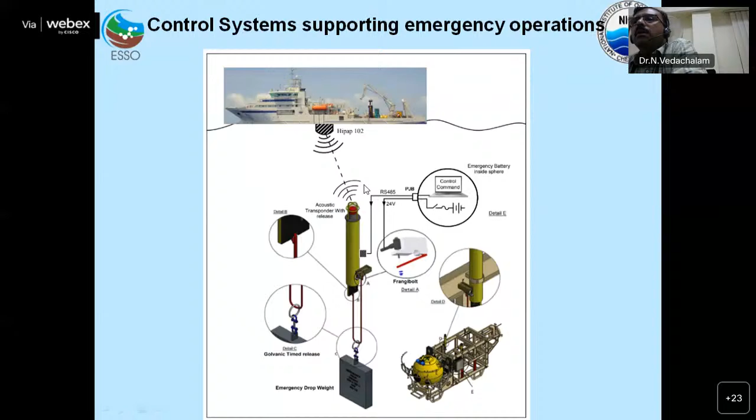If there is an extreme loss of buoyancy, we have this kind of emergency drop weight. The unique feature of our system compared to other operating submersibles in the world is that these drop weights can be ejected using an acoustic command from the ship. This is one of the key aspects implemented in this Matsya 6000.

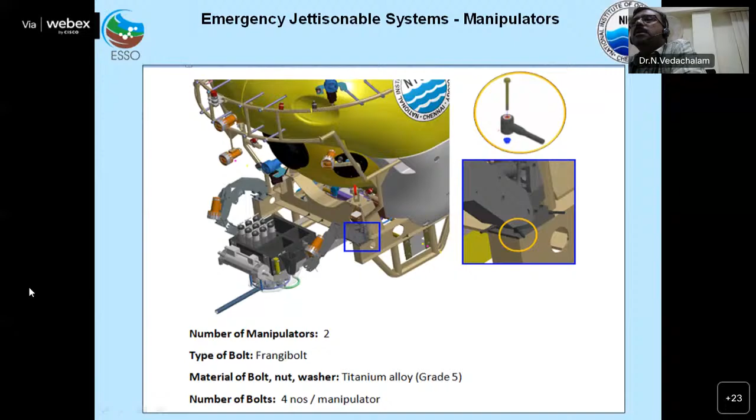As I told you, there are increased possibilities that when the manipulator is enabled during an operation, sampling operation, or intervention operation, it may get entangled with a seafloor object. In that case, we have systems to jettison the manipulator arms alone, and the submersible can come back. This is achieved with this kind of system.

The jettisoning should be done with the available power supplies. Until the availability of the last power supply, this operation should be able to be done. So all sorts of reliability calculations have been done, all scientific methods have been followed, and the best possible configuration has been given to exercise this jettisoning operation.

Finally, if there is a problem of the submersible being stranded on the seafloor which we are not able to recover, and if we're not able to release the weights and come back, we have a system called a buoy, which when ejected by the submersible pilot, will roll out and come to the top, with beacons, the satellite locating beacons at the top.

That is a subsea rated beacon, which will not work subsea, but when it comes to the surface, it will communicate with the ship and the satellite, which will help us locate the submersible. There are also systems being designed by NIOT, something like a messenger mechanism which can be passed through, locked to the submersible, and repaired at the top. It is in the highest level of design currently.

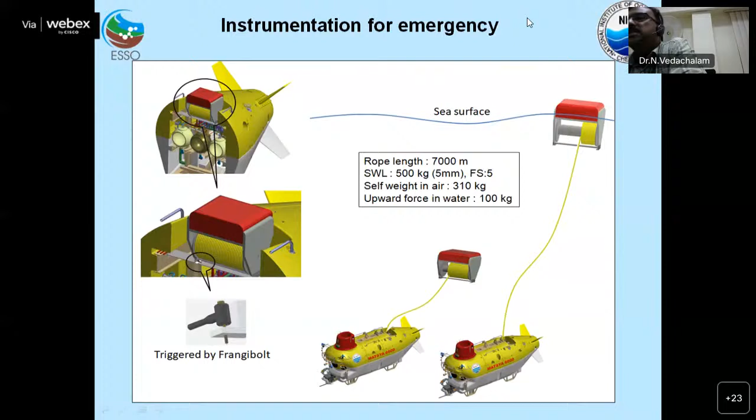In addition, Dr. Ramesh might have mentioned that we conducted a national workshop to find out the needs of the scientific community in terms of oceanographic, biological and geological perspectives, based on which we have identified scientific payloads.

The engineering system is being designed in such a way that based on the mission, whether it's a biology related mission or an oceanography mission, the sensor suite can be interfaced with minimum disturbance to the configuration. So this is what the scientific payload is about.

With respect to this, we have completed the complete design, and the major subsystems of the submersible are under procurement. Almost 50% are procured, and the rest are in progress. Since this is a manned deep water mission, procurement of components is a major challenge because developed countries are reluctant to support this, so many products are developed in-house. We have taken the help of Indian technological majors like ISRO, DRDO, etc., to handhold NIOT in achieving this national objective, to put India on the global subsea human map.

So with this, I end my presentation, and I thank the meeting organizers for giving me an opportunity, and the listeners and audience for patiently listening to my presentation. Thank you very much.

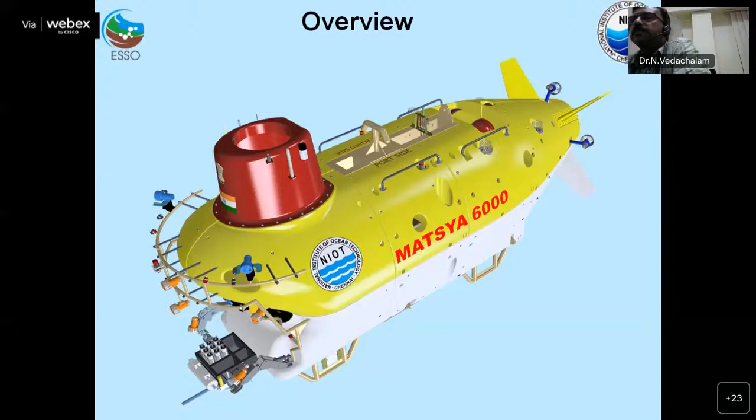Actually, this is the vehicle which is upcoming right now, because it's a manned mission underwater. Almost 5-6 vehicles only are available for 6,000 meters in the world. So we need a lot of partnership, and we wanted to disseminate the knowledge which NIOT is doing on this manned submersible program, and there will be more programs coming up in the manned vehicles also in the coming years, based on our success rate with this vehicle.

So basically, this vehicle's design is now completed. Even at this point, he could not show how many components have already been realized. We are aiming for the end of next year as a target for completion of all the components, procurement, integration and so on. From 2024 onwards, we will be going for sea trials for the integrated system. That is the target we are working towards.

It is highly challenging, being a man-rated vehicle. So we are looking forward to partnerships. Any industries who would like to come and discuss with us and partner with us are welcome. So with these few words, thanks to Dr. Vedachalam for giving a nice presentation and overview of the manned submersible.

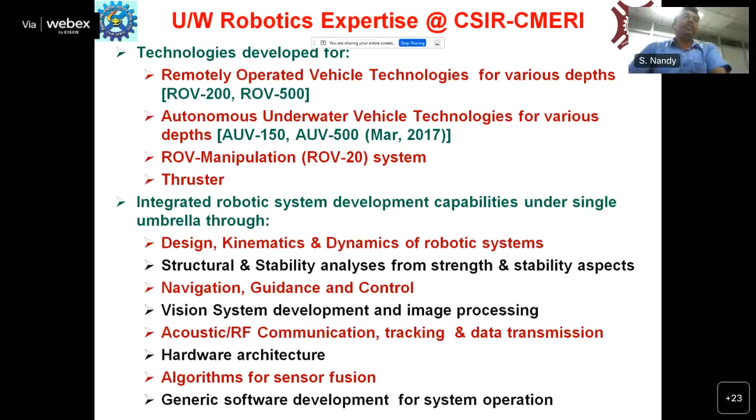This is a typical scenario of working of any autonomous system. It will be launched from the mothership. The vehicle will be operating underwater, and it will have a number of payload sensors as well as navigation sensors and payload sensors. It will have an onboard energy system.

Am I audible? Yes, yes, yes, doctor, okay.

So it will have onboard energy system as well as onboard intelligence, to take critical decisions, like when an obstacle is detected, it will be able to avoid that obstacle, as well as if there is a critical situation like energy level being very low, in that case it can cut off its mission and come up to the surface. It will have a bi-directional communication link, like acoustic modem and USBL tracker. This kind of autonomous underwater vehicle should have a fault tolerant control system, as well as a number of emergency safety features incorporated into it.

This is the broad portfolio: AUV 150, which can operate up to 150-meter depth. Then ROV, which we developed for 200-meter and 500-meter depth of operation. In the recent past we also developed an autonomous underwater vehicle that can work up to a depth of 500 meters. And very recently we developed a small portable ROV with a manipulation system, so that it can pick some objects from underwater, as well as an indigenous thruster that I will show in subsequent slides.

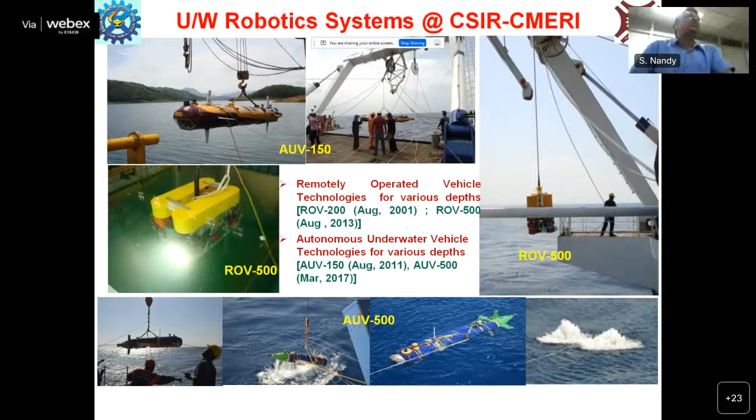This is the AUV which can operate at a depth of 150 meters. This is a work class AUV, length 4.8 meter, diameter 0.5 meter. Weight in air was 490 kg and buoyancy is 495. The basic objective was to map the seafloor and collect oceanographic data like salinity, temperature, and conductivity. The mission duration was 4 to 6 hours.

It was equipped with a number of navigational sensors like INS, DVL, depth sensor, and altimeter, and payload sensors in terms of side scan sonar and camera. It was associated with an intelligent controller to perform autonomous motion like lawnmower trajectory, circular trajectory, or any other trajectory envisaged for a particular application. It was also equipped with a hybrid communication system, acoustic and RF communication.

The vehicle was indigenously developed at CSIR CMERI. The design was ours, and the control software as well as the whole system architecture was done by CMERI. But due to lack of availability of equipment and sensors, those were procured from outside, starting from thruster, navigational, and payload sensors. But the complete development was done indigenously at CSIR CMERI only. This vehicle was tested at the Chennai coast with active support of NIOT Chennai.

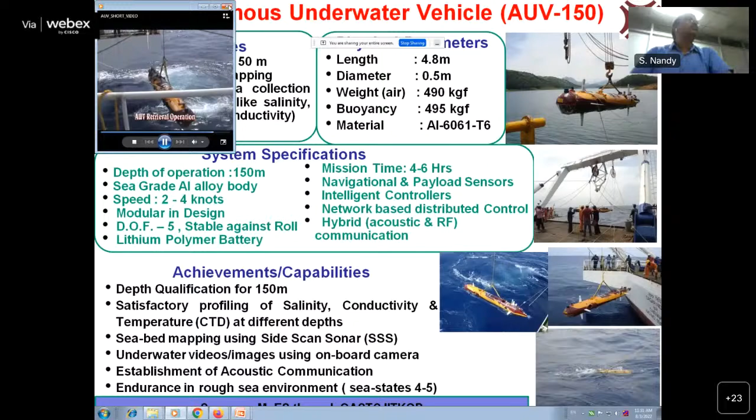This is a small video showing the capability of the vehicle, which can move based on altimeter data only, and it can capture video while it is moving. This video was captured while it was tested at Idukki lake, Kochi, with the active cooperation of NPOL.

So these are some of the glimpses of the picture that was acquired during the AUV trial, and the mapping of the seafloor was done using the side scan sonar data.

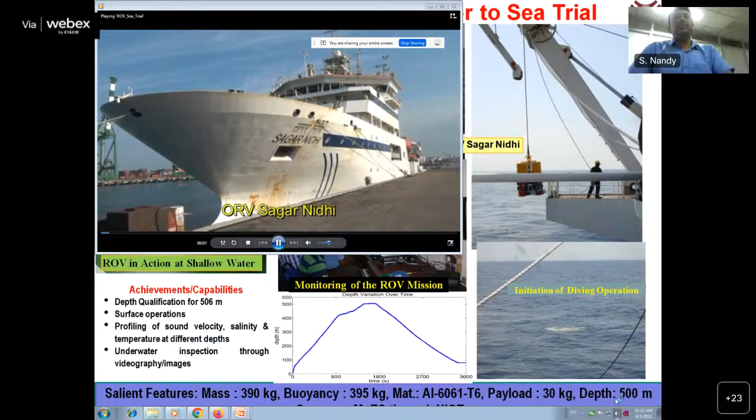So this is the ROV. You have heard a lot of things about ROV, and NIOT has developed ROV up to 6,000 meter depth rating. They have also developed a polar ROV, and CMERI has developed ROV 500. So these are glimpses of the trial of ROV 500 at Chennai coast.

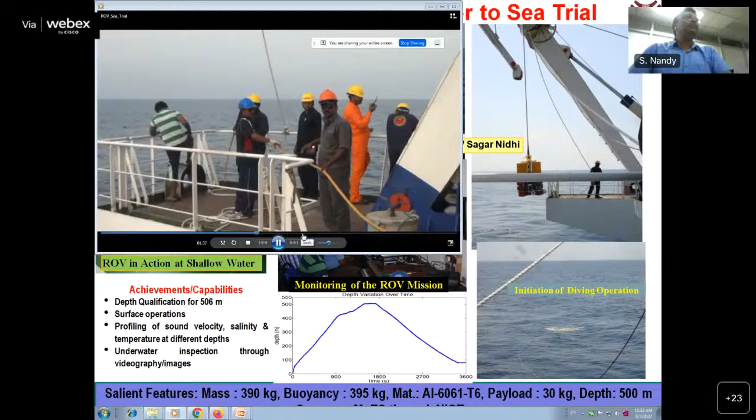So this is the cable umbilical tether. The ROV was tested up to a depth of 500 meter.

Based on this expertise gained, CMERI has developed an AUV for 500-meter depth of operation with CSIR funding. We are very grateful to the Ministry of Earth Sciences, who helped with funding to work on this project of AUV and ROV, and based on that expertise we were able to develop the AUV for 500-meter depth and subsequent underwater systems.

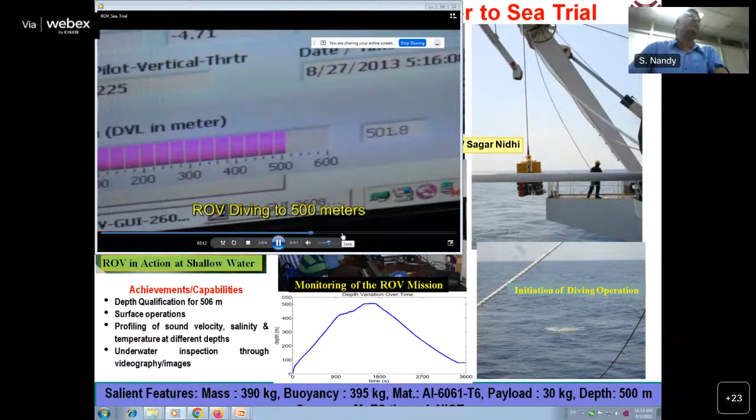So this is the AUV 500 that was carried out with funding from CSIR, and it was tested in March 2017. The physical parameters of the vehicle are: length 3.8 meter, diameter 500 millimeter, weight 403 kg, with positive buoyancy of about 5 kg, and the material for the structure is aluminium 6061-T6. The vehicle was tested off the Goa coast, and we used the ship of NIO because it was a multi-lab project within CSIR.

NIO was associated, CEERI Pilani was associated, CSIO Chandigarh and CRRI New Delhi were also associated with this project.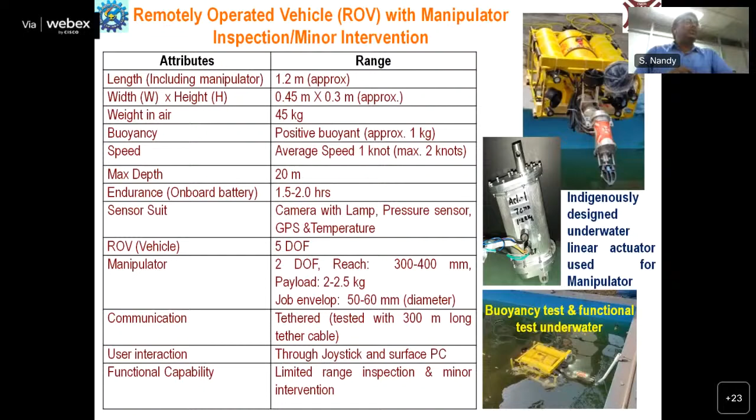Then stress analysis, then hydrodynamic analysis in terms of grid generation, and control surface design - how to design the control surface for various kinds of autonomous underwater vehicles, ranging from small to very high range. Then kinematics and dynamics, sensor calibration, modeling and fusion of sensor data, and of course robust control, navigation, guidance and control, and finally acquiring the payload data and mapping the data with respect to that particular scenario.

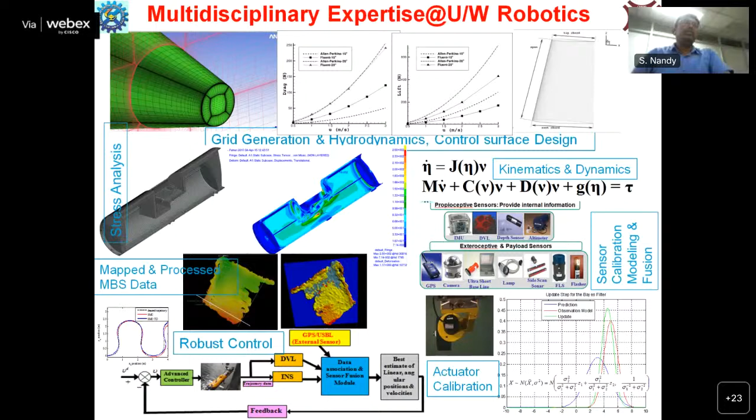So this is the navigation and guidance scheme. This is the trajectory planner, and from there we get feedback from different sensors, and based on that state feedback, the advanced controller will be finding the control input based on the inverse dynamics model.

From there, the relevant torques or other information in terms of voltage or current will be sent to the vehicle actuators, and the vehicle will move. The actual parameters will be measured with the help of the inertial measurement unit, Doppler velocity log, depth sensor, and altimeter. Then there will be a sensor fusion module.

That will give the best possible estimate of the system state based on the Kalman filter, particularly the extended Kalman filter algorithm, and that should be associated with USBL data to get the absolute positioning of the vehicle, and that data will be transmitted to the trajectory planner to get the further control inputs.

Further to this area, the development of autonomous underwater vehicles and remotely operated vehicles to a bigger scale, we are also working in the domain of biomimetic underwater fish fin-like actuators. Fish have different kinds of fins like pectoral fin, caudal fin, pelvic fin, and dorsal fin. Here we have tried to mimic one such kind of fin, the pectoral fin, and we have carried out the hydrodynamic analysis in terms of blade element model.

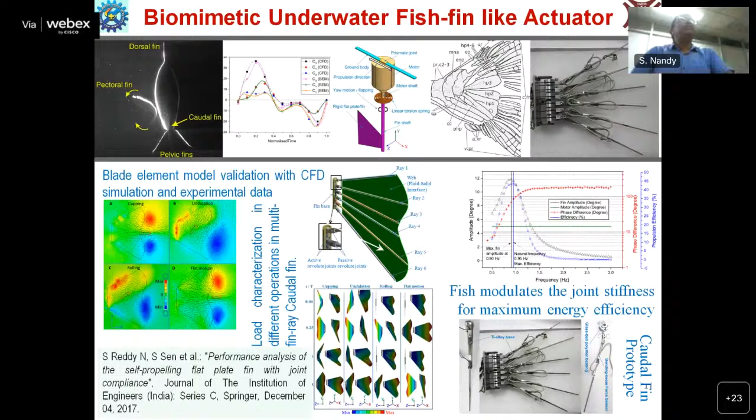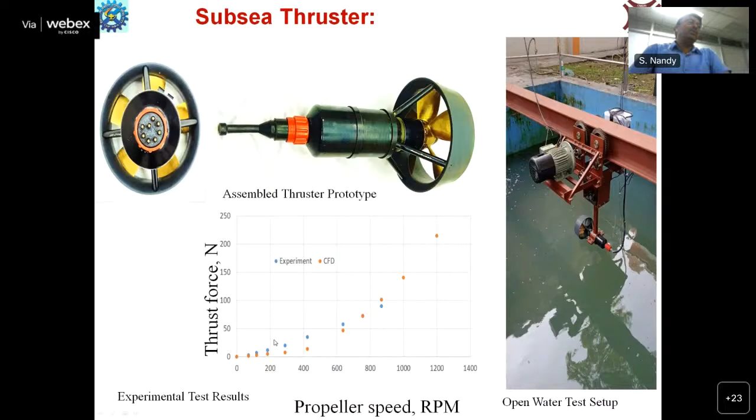So as I said, we have also developed the indigenous subsea thruster very recently. Thrust capacity is 20 kgf, depth rating is 1500, power input is 1 kilowatt plus minus 20%. For this thruster development, the motor was also developed indigenously, not by us but by some parties based in Mumbai and Gurgaon - they developed the motor based on our specification. Other components like the controller, propeller, and all the body of the thruster have been developed at our end only. The test setup also has been developed at our end, and when we tested the thruster experimentally and based on the CFD data, we have validated it.

So then we are also working in the domain of underwater manipulator. As I said, this ROV is associated with a tooling manipulator. The linear actuator has been indigenously developed, and that tooling manipulator with a gripper is associated with the ROV to carry out various jobs, starting from picking some object which has fallen underwater based on camera-based image processing as well as sonar-based localization. This manipulator has been developed and tested for hydrodynamic analysis, and a recursive Lagrangian dynamics algorithm for serial link underwater manipulator with empirical formulations of hydrodynamic forces has been carried out.

Recently we have started working in the domain of homing and docking systems, because autonomous underwater vehicles or other unmanned underwater systems are being developed. But what is the problem while launching and retrieving? While launching, one time it is okay, but when the battery is exhausted, we have to retrieve it and charge the vehicle. So there is a tremendous, extreme need to develop the homing and docking system so that the vehicle can be charged underwater and the data can be transferred underwater only, with the help of a suitable homing and docking system. This is a very challenging task. We have done some primary work in this domain, and we are also going to work on this, possibly under the Deep Ocean Mission.

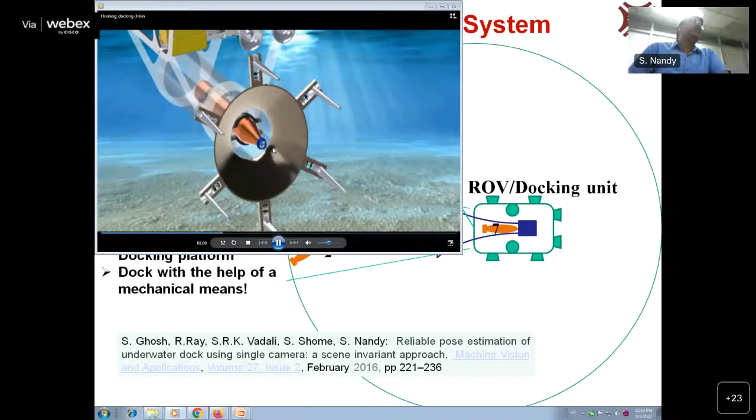This is a ROV which has an umbilical cable which can carry power and signal both. It is carrying the autonomous underwater vehicle. The AUV can come up, do the survey, and when the battery level is below the threshold, the AUV again comes to this docking station and does the possible charging as well as data transfer. So it is not required to retrieve the vehicle every moment - it can work for a month or even a year if required, based on the possible applications. This is a schematic representation of the homing and docking system.

So possible future activities - as I said, homing and docking is a very challenging task, and in the Indian context it is also required to develop such a system to avoid retrieval of the vehicle, so that it will not get damaged, as well as to carry out long-term survey and exploration, so there is no deficiency of power. Most unmanned underwater systems are till now battery-based, and people are now going for fuel cell-based development also, but for that also power is limited - you cannot operate it for indefinite time.

Currently we are also working on AUVs which can work for long endurance and long range, for monitoring, exploration, and surveillance in the societal parlance as well as for defense parlance. For that kind of application, navigation, guidance and control will be a big challenge, particularly when the vehicle is working beyond the domain of acoustic range.

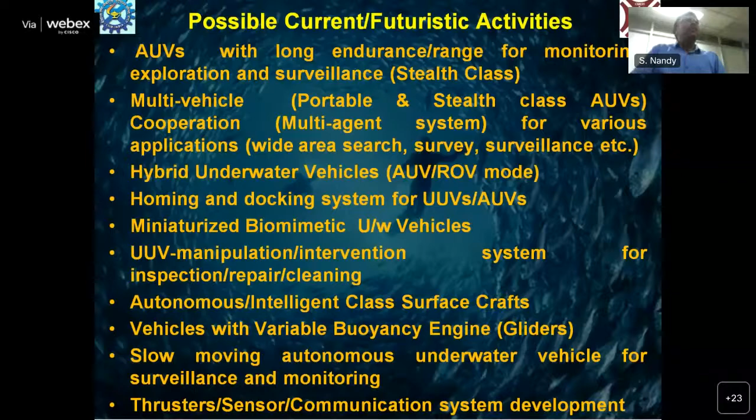And of course, the need is development of indigenous components, starting from propellers, sensors, and communication systems. So we have a strong collaboration with NIOT Chennai, and we are hoping to work under the Deep Ocean Mission to carry forward our work further. We also have association with NIO Goa, so hopefully we will be working together in the domain of AUV for higher depth rated operations, like maybe 4,000 meters or beyond.

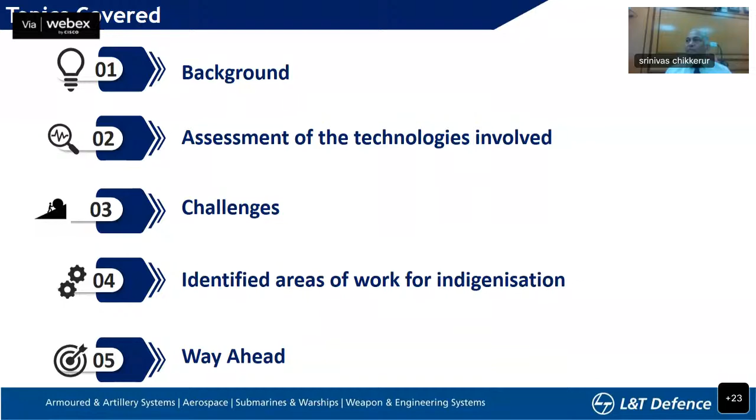India received the status of a pioneer investor and was allotted the exclusive area in Central Indian Ocean Basin by the UN. Thereafter, in March 2002, we entered into a contract with the International Seabed Authority for exploration, and the contract was extended by another 5 years in 2017.

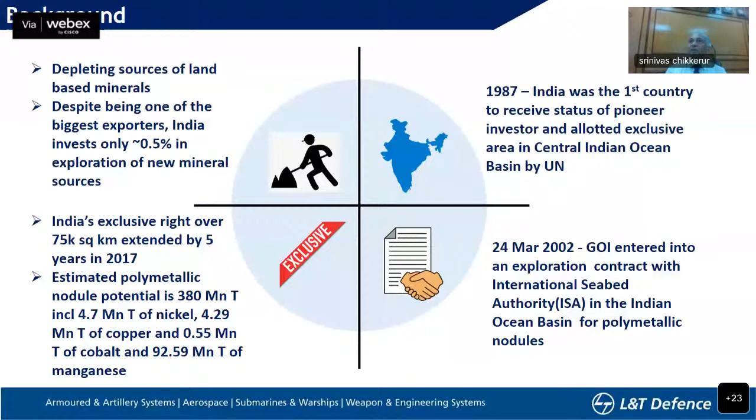Now, where are we? Almost 35 years. What are the technologies required to be addressed by us? High pressure systems, remote operation of various unmanned, manned, tethered systems, complex metallurgies, material requirements, and handling of this technology for these various requirements, which are dual use and therefore denied by various countries who have it.

As we have seen in the earlier slides, only 5 countries have put their men to these great depths, and when we do it, we'll be the 6th. The limited countries which have done it, it's been supported by the government, and the industry there has matured and caters only for that limited requirement. So it's not shared openly, or they are not willing to share the technology with our countries.

So whatever anybody else is trying is in a very nascent stage, and the handful of suppliers who are there, who have been working at greater depths beyond 1,000, 2,000 meters, they do not want to share these technologies.

In the last around 10 years, L&T has extensively interacted with various foreign OEMs on various projects for NIOT and other underwater purposes for the country. As we know, these items are not in serial production. They need to be produced on order or as the requirement exists. So because of these factors, you cannot get an item ready-made even in the commercial market outside.

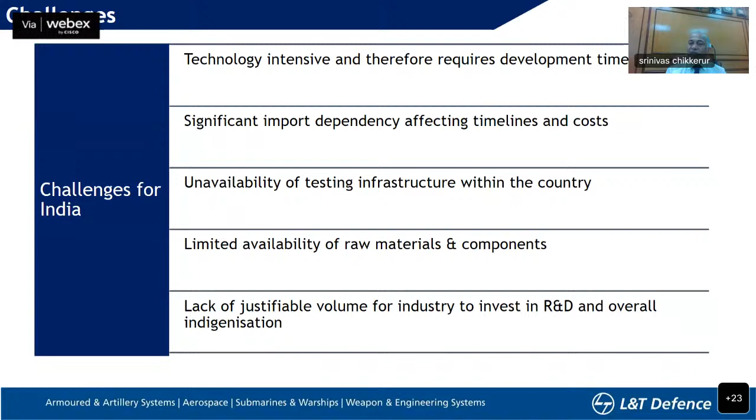Now, what are the areas of work, which again has been brought out in detail by various other earlier presenters? I'm just summarizing a few facts here: fabrication and manufacturing, high pressure systems and equipment, cables, connectors, harness, instrumentation and controls, integration of subsystems and systems, test facilities, payloads, and certification and acceptance.

So now, if the industry has to take part in various activities, what could that be? We need to define if it's for scientific applications or for commercial applications. Now it's in the region for the control of the platforms per se, the various platforms. As was again brought out in glimpses in certain presentations, it's the vessel per se, that is a deep vessel, AUV or UUV, or the manned vessel.

Then there is a launching mechanism, which is a different technology and different aspect. And third is the mother platform, the mothership. So it's a requirement of three sections, and the customer or the government would need help in all these three segments. So first of all, there needs to be an integrator at the subsystem and system level.